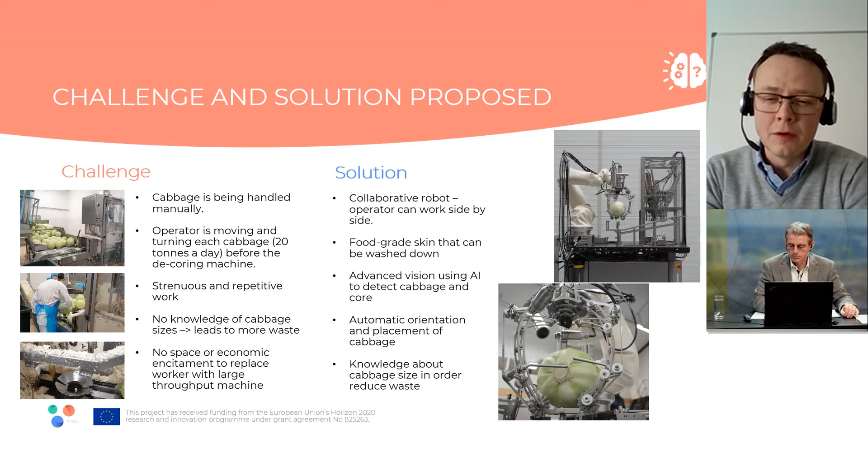One side note was that using the system, we were also able to estimate the size of the cabbage, meaning that we could optimize or minimize the waste that was produced.

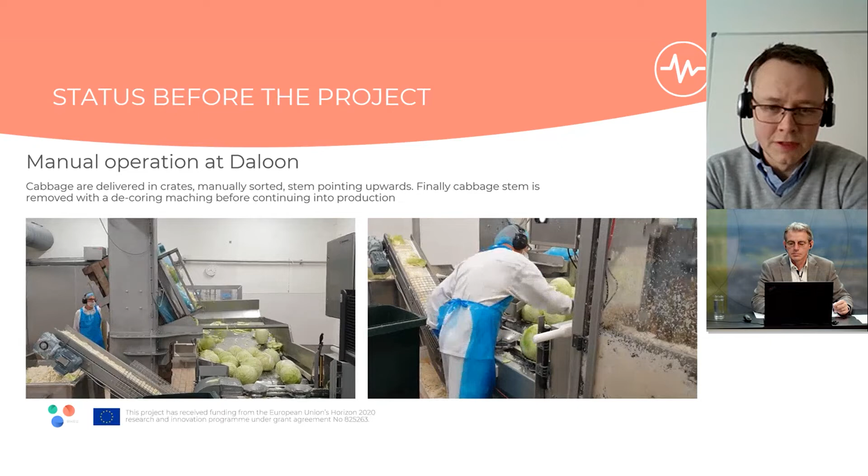So this is the way that it's done today. The manual worker is placing the cabbage in the machine, and he needs to reorient it every time.

This is just a video showing some of the other machinery that they also have, and at some point here you will also see what is happening with the robotic solution that was worked on. Here it's measuring the cabbage size, and this is the decoring machine that goes in and removes the stalk.

This is then the gripper that was developed in this project. It is able to reorient the cabbage, and then a vision system, as you will see shortly, will find the root.

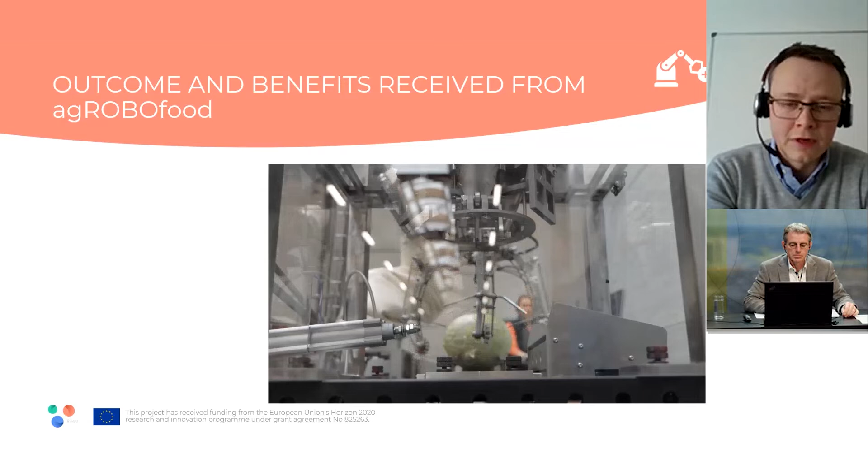You can see here that it's rotating it to search for the root, and when it sees it, it figures out how to align it. You will see in a short time it will also show how the AI is working.

Here you can see how the stem is located, and then it's estimating how the cabbage should move in order to get it aligned. Now with the new decoring machine, it was able to only remove the part of the stalk that was needed to be removed.

So to sum up on this, Daloon, which was a company producing these spring rolls, gained a lot of insight into how collaborative solutions could be implemented. Of course this means that collaborative robots are especially good for situations where you have space requirements or don't have much space in your factory.

Then, of course, there was the problem of food grade robotics that was solved with this sleeve that could be put on a robot, meaning it could be used for food processing. We used this AI vision component that was able to detect the root, and then use that information to orient the cabbage to be placed in the decoring machine.

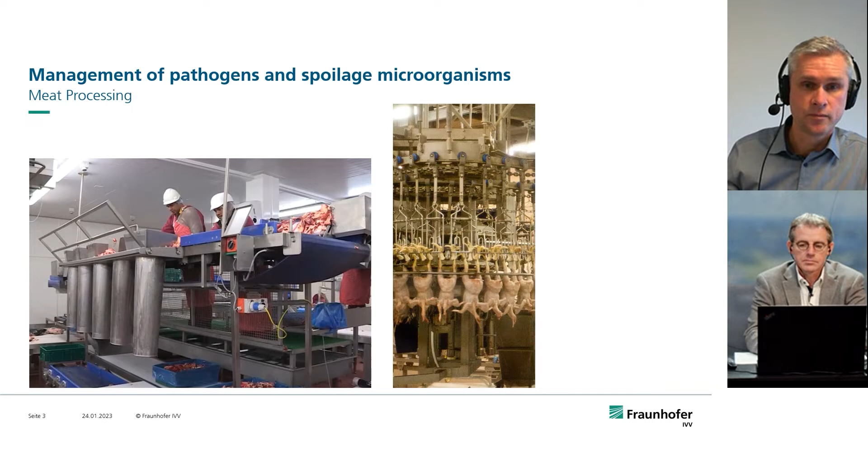The main challenge is usually in food processing, the managing of pathogens and spoilage microorganisms, to assure that microbial growth is mitigated. This is a huge challenge for almost all areas in the food industry, not only, as you see here on this slide, in meat processing, with relatively favorable conditions for microbial growth, but also in the production of dry products.

Measures must be taken to avoid microbial contamination as best as possible. This is a nice publication from 2013 with a good discussion and root cause analysis on how low water activity foods, or dry foods, are under constant pressure by foodborne pathogens.

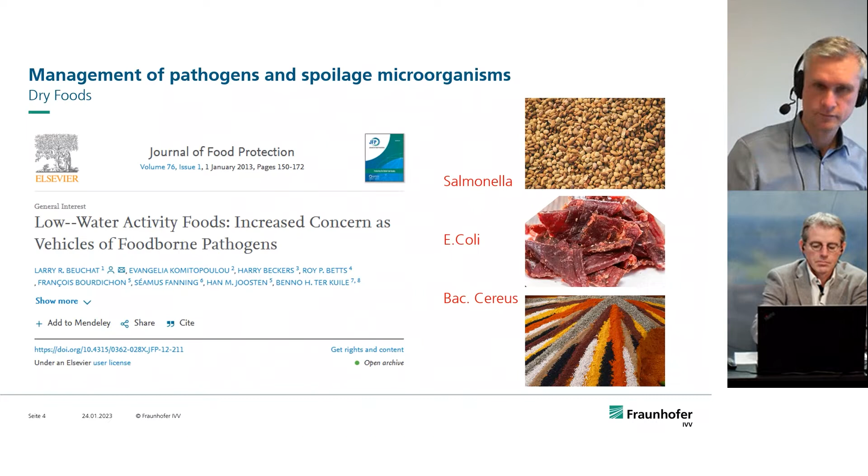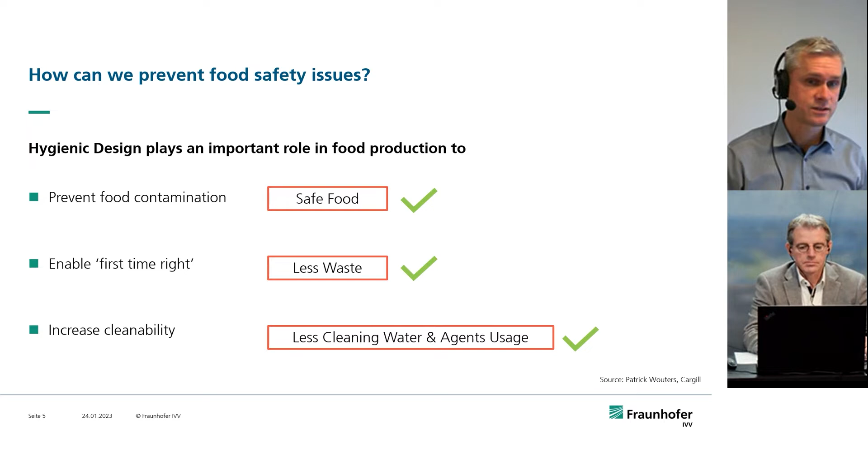If you want to prevent food safety issues, you have to deal with hygienic design, since hygienic design plays an important role in food production to prevent food contamination, but also to enable first time right, so produce less waste, and to increase cleanability.

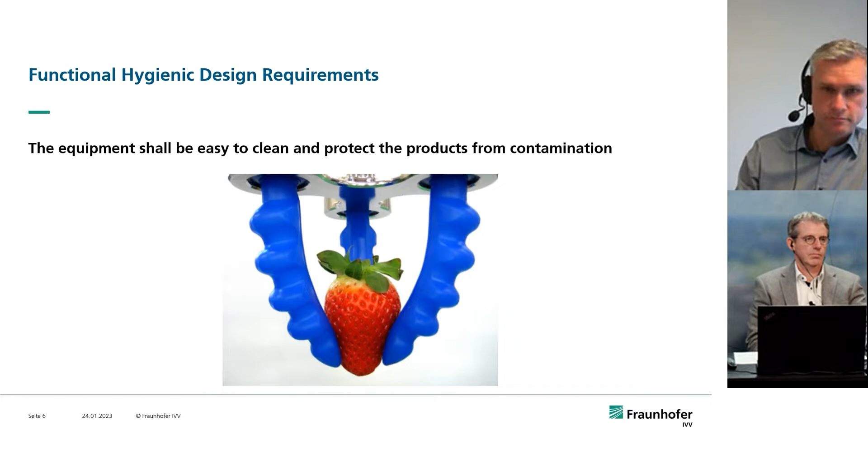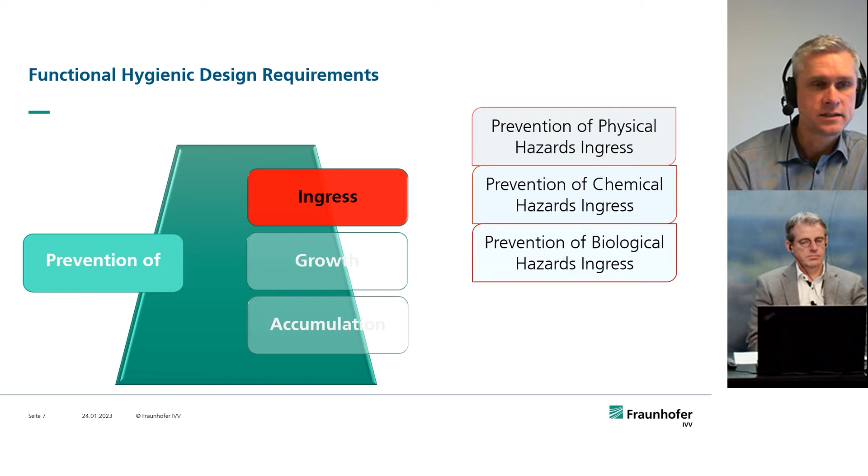There are 4 functional requirements on hygienic food processing equipment and food factories. The first requirement is that food processing equipment shall be easy to clean and shall protect the products from contamination. The second requirement is that hygienic equipment should be designed to prevent the ingress of physical, chemical, and biological hazards.

This can become very important during production where remaining microorganisms may grow very rapidly, and due to this, more frequent cleaning becomes necessary, just as is the case in meat processing.

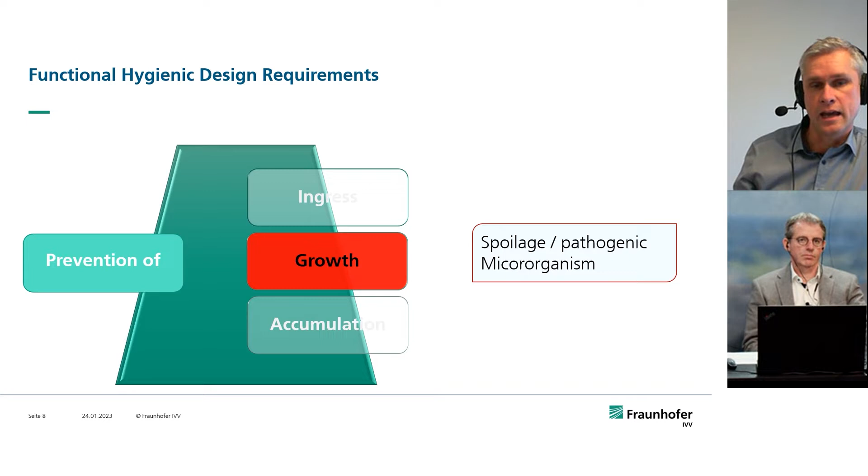Hygienic equipment should also be designed to eliminate any areas where product, dirt, dust, or condensate can accumulate or build up, as this can promote microbial growth.

Therefore, horizontal surfaces, hollow spaces, holes, and crevices should be avoided. Again, this can become very important during production, where product may accumulate very rapidly, and again more frequent cleaning becomes necessary due to this.

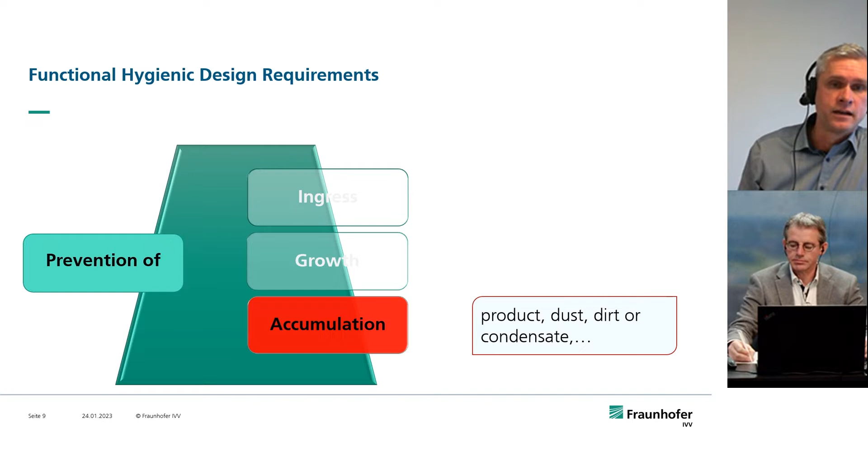These functional hygienic design requirements can be easily met by applying hygienic design principles, and this is not rocket science. As you see here on this slide, there are only a few general requirements or principles to be applied.

On one hand, hygienic equipment should be accessible for cleaning and inspection. It should be self-drainable and, of course, made of proper materials of construction, usually not aluminium, since there's an issue with cleaning aluminium.

Furthermore, it should have cleanable surfaces, and if necessary, a segregation into zones with different hygiene requirements should be considered. For the rest of the presentation, let's talk a little bit more in detail about the issue of crevices.

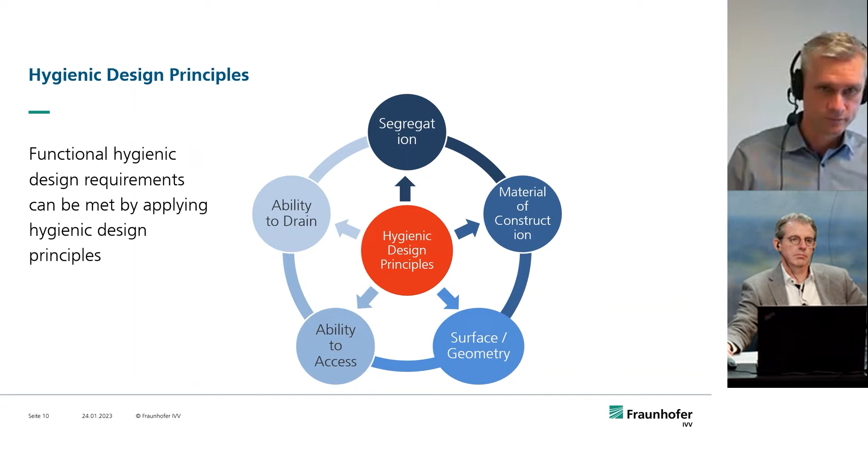Crevices in food contact areas are one of the main reasons for food contamination, especially direct metal-to-metal joints, which should not be used as they create crevices. Within the crevices, soil liquids may accumulate, microorganisms can grow, and of course, if you bring together two different metals, they can corrode.

If metal-to-metal joints can't be avoided, then please use elastomer gaskets to separate both surfaces, and then they are sealed and usually easy to clean.

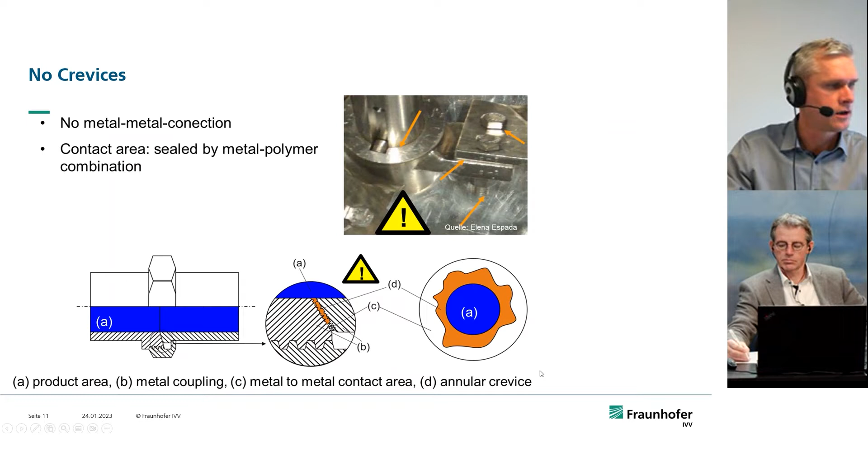What you see here in the picture is an example. This is an agitator shaft with many metal-to-metal crevices. You see here screw heads, you see here the shaft, and then the agitator. You have here the crevice, this annular crevice. For microorganisms, this is like a 10-lane motorway, quite a lot of space to be filled up with microorganisms.

Screw heads are another example of critical surfaces. Please eliminate exposed screw heads in your design, as they are not easy to clean.

I want to illustrate this in the video, which compares the cleanability of a standard open thread machine leveling foot, on the left hand, and a hygienic design leveling foot on this side. This part and this part are exposed to the environment, while this part above the screw and above this elastomer sealing is covered by the machine. So what is of interest for cleanability and hygienic design is this part and this part here, and of course the food itself.

What you see in the cleanability test is what I mentioned. We soiled both leveling feet with a fluorescent test soil. Green is the test soil, and when it's removed, the picture becomes dark. You should clearly see the difference in cleanability. So let's start with the video.

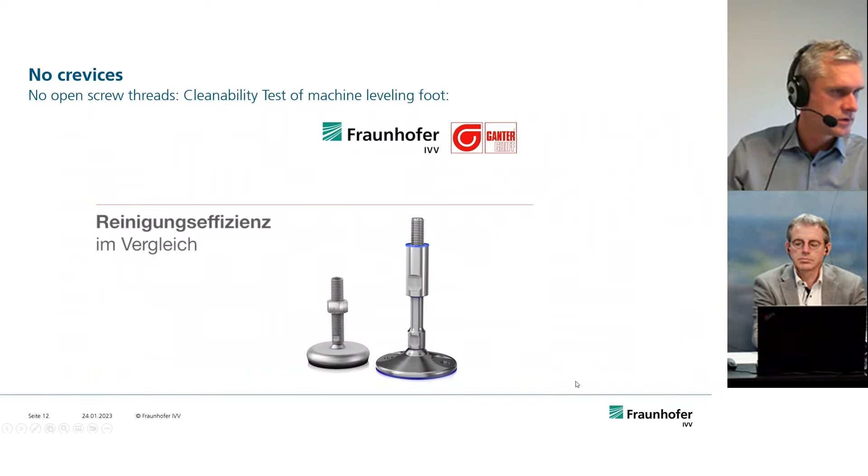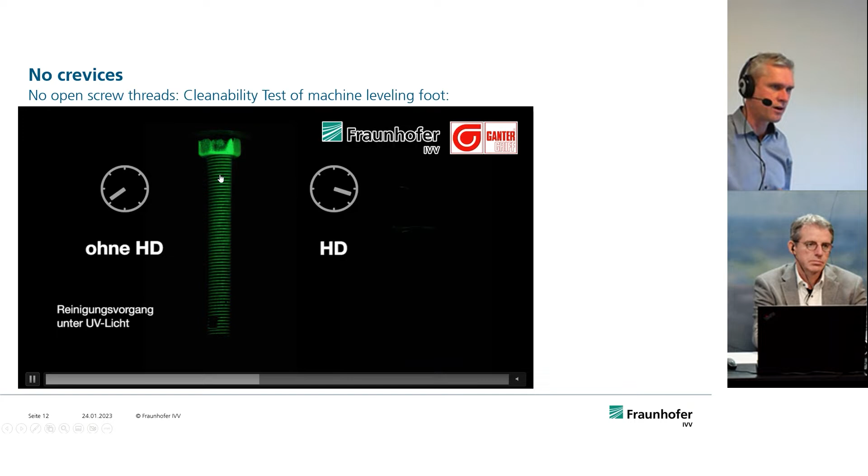This is without hygienic design, this is with hygienic design, and you see that screw threads are actually not easy to clean. We've cleaned here with spray cleaning and foam cleaning, which is a normal cleaning procedure in food processing.

Here you see a comparison in cleaning time, which of course is one issue. With the hygienic design, you are faster. But the major issue with the non-hygienic design is that it's not cleanable at all. You always have residual soil on the surface, and this is very nice for microorganisms. They can grow very easily and spoil the rest of your factory.

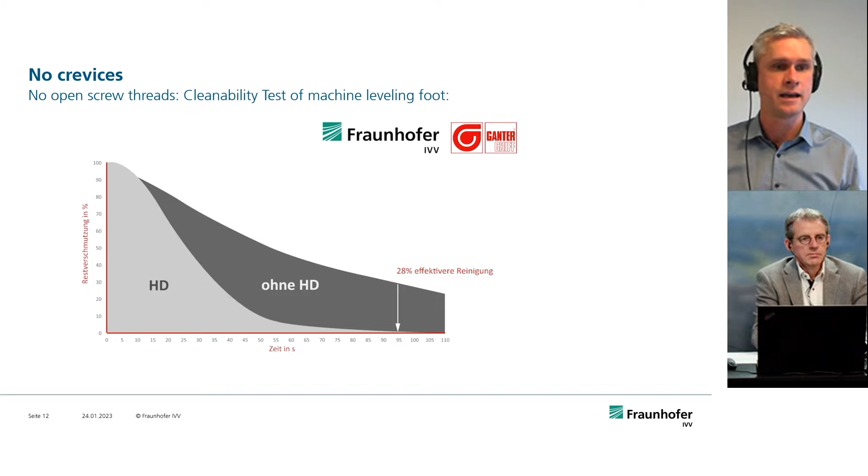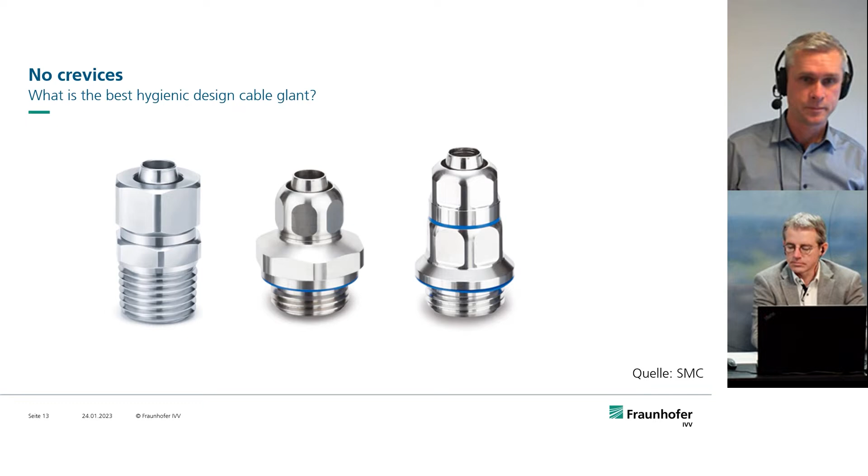From my point of view, a critical area in the design of robots is the design of the joints, which also must meet the functional hygienic design requirements. The use of O-rings to seal the joint is not a solution, as you see here, they form crevices.

If you use the standard design, this is actually a hygienic design O-ring format, but you have here these crevices, and this is not easy to clean. You have these crevices here.

Here you see the result of a cleaning test that we did with this design solution. What is white here is the residual soiling in the crevices after a spray cleaning test.

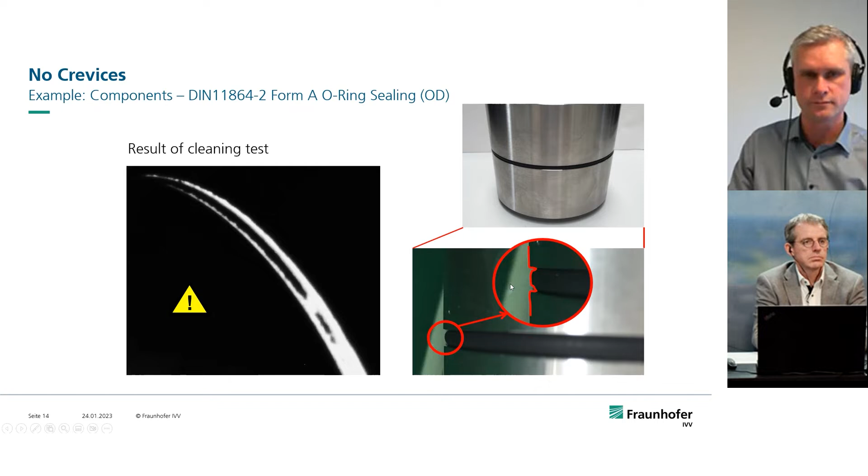So maybe all the discussion on hygienic design in robotics comes down to the question of whether the application of robots in hygienic food processing areas is possible only with protective covers. From my point of view, I would say with a good hygienic design, it's of course possible to use robots in direct food contact without a protective cover.

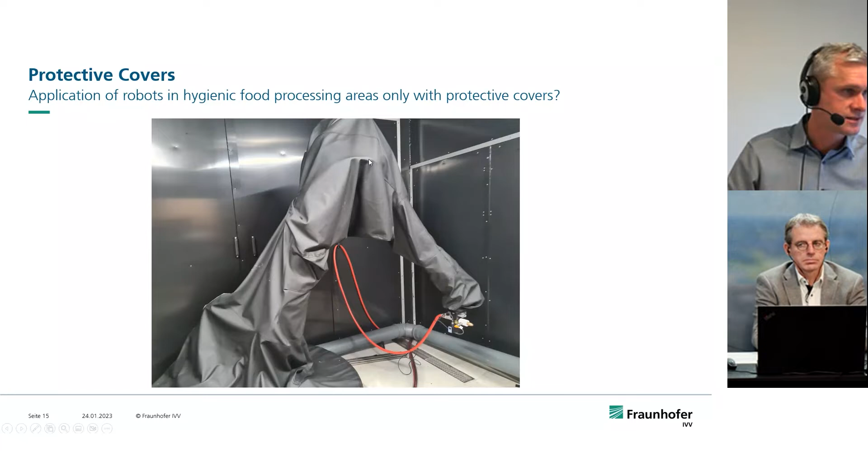But if the robot is not food grade or in hygienic design, you have to use these protective covers. But you know there are other issues with this.

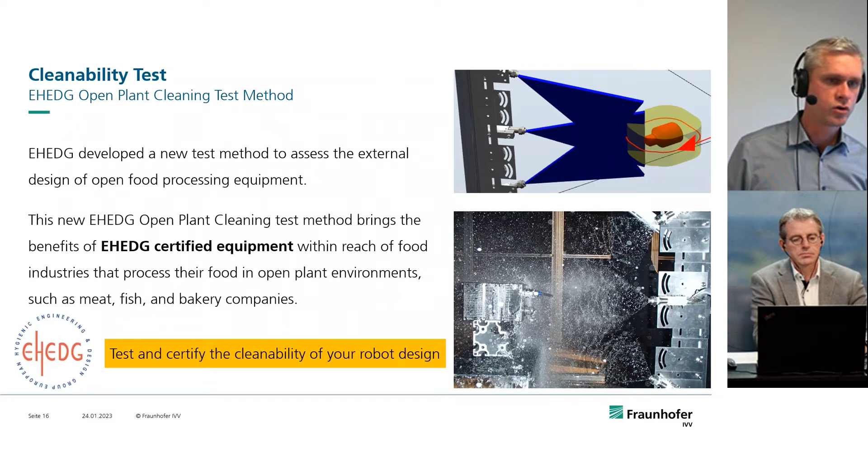So as a short summary, hygienic design and engineering of equipment assures that food is safe and suitable for human consumption. Functional hygienic design requirements can be met by applying hygienic design principles. This is not rocket science at all. Hygienic design can be assessed by cleanability tests. And last but not least, hygienic design certification is available and recognized by the food industry.

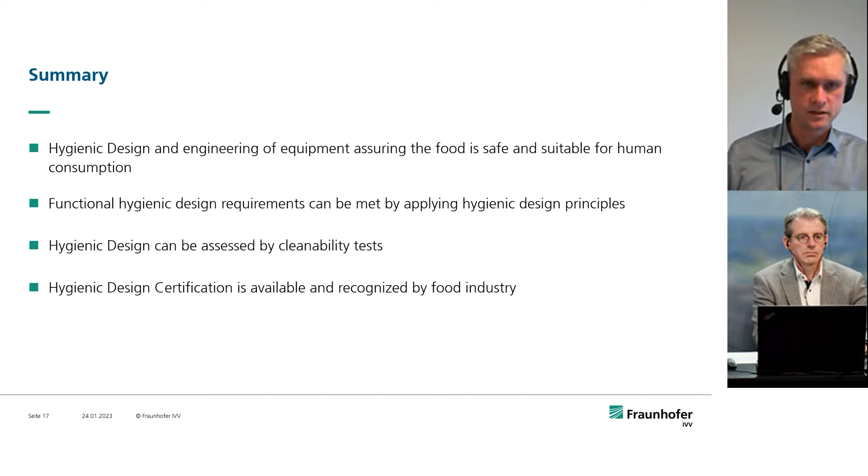So I did a project together with Mark, and I value that very much, that project, and we learned a lot from it. I try to apply all the knowledge also in our projects today, and we are even taking part in our hygienic design network in the Netherlands. So we are moving into that direction. But we are also in contact with many startups and research groups who all want to handle food, and of course we value that very much. But can you explain, because they are all new in the field, what should they do? What's the first step if they are going to handle food? What are the roads to go? Who should they contact, so to say?

Yeah, of course, as I said, it's not rocket science. The first step could be to go to the EHEDG webpage, ehedg.org. There are guidelines available. Document number 8 is free for download. There you can find the main principles. They talk about materials of construction, the roughness of product contact surfaces, crevices, with a little bit more explanation than what I've shown here in the presentation. All the information you can find there. So this is probably the best starting point.

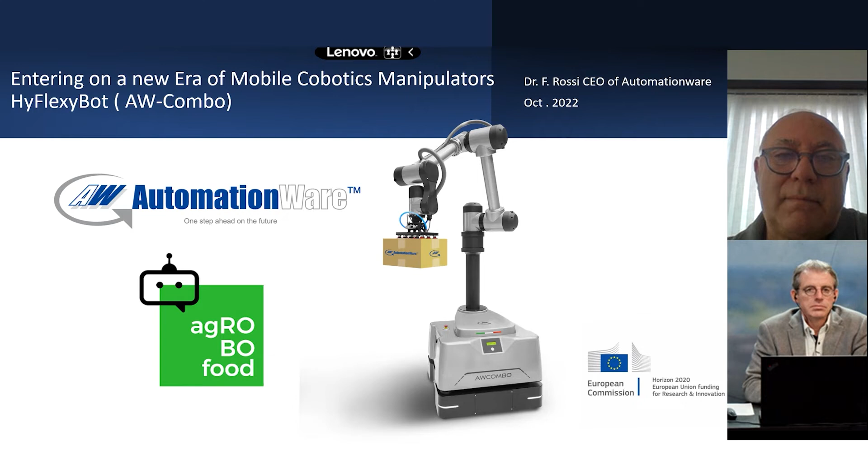So the company, thanks to this project, has been acquired a few months ago by a large industrial group that is going to bring our technology to a very large customer. This is giving you a clear understanding that this is a very successful project. It has an impact on food application, especially on the end of the line and logistics, but also in other segments. You can recognize some of the brands that are asking us to use this kind of technology for logistics and end of the line production.

Few words on the company. We are based in the northeast of Italy, close to Venice. We are ISO 9001, and we are also certified EcoVadis. This is a main requirement to apply that kind of technology to the large accounts that we are targeting. Very strong collaboration with key research centers, Fraunhofer Italy, for example, that have been part of this project. They really helped us a lot to create the software platform and the conceptual AI technologies for this project.

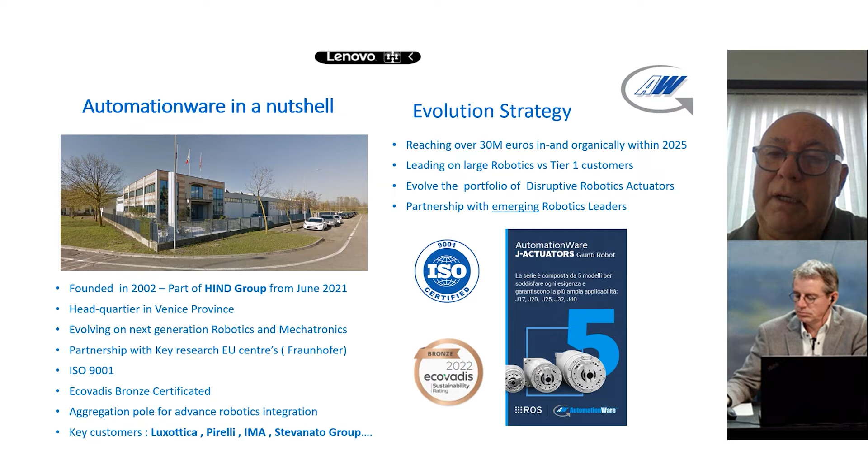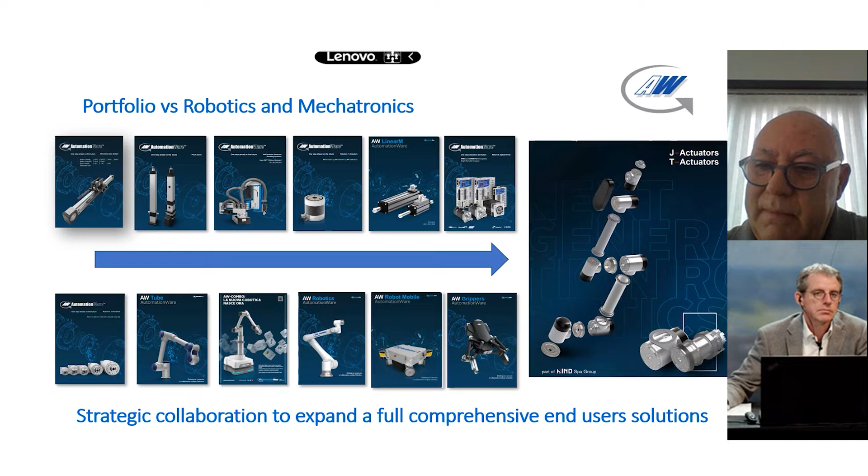This is what it is. It is basically, as I mentioned before, a robot that can really move around with very incredible precision, even in limited space areas where you need to do small movements to make sure that you can really pick and palletize end of the line food production, for example. Then we can select different kinds of grippers, so you can have different arm configurations. There is a 3D camera embedded for the navigation system and the picking, but also a good level of safety to be compliant with the regulations that require this kind of robot to move without risk to humans in the environment.

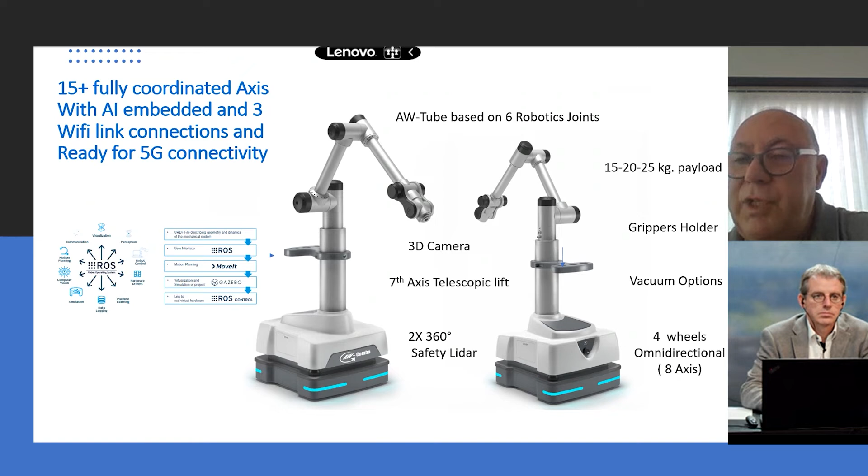So we are in the process of doing the certification of all of this. The joints are already certified by TÜV, and even the arm. We are now in the process of certifying the full system.

There is a great fit in the agro-food industry. The pharma industry is also looking at this kind of system because we can offer agility, and also we can avoid contamination on critical production systems. I'll mention specific applications in a second.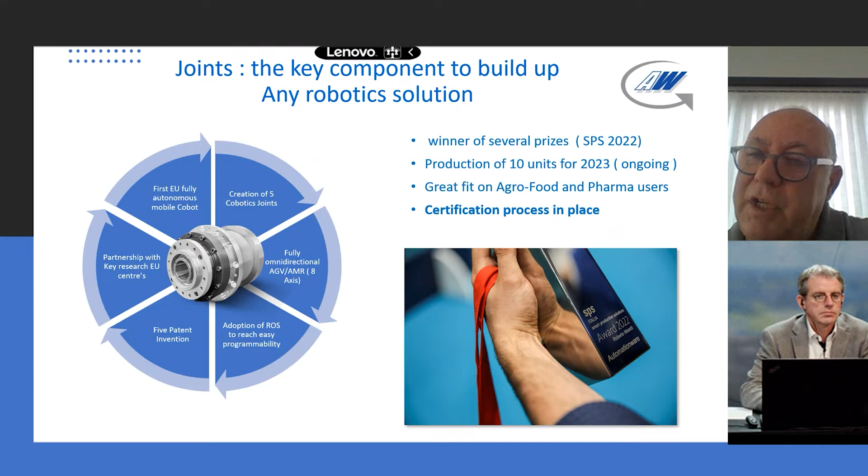Here on the left side you can see a small video showing the joints completely disassembled, and then the composition on the right side, where we basically compose any kind of arm required for the application. It can be a small arm or a large arm. One important thing, one of the limitations of cobots, is that the payload can go up to 25 kilograms.

That's very important when you have to palletize, for example, or do picking of very heavy stuff. So once again, the approach was to use a robot that can be suitable not just for traditional robotic applications, but also as a modular system that can be applied in the agro-food industry, even for external activities like picking fruits or similar tasks.

Again, there's flexibility to have joints that can be completely purchased naked, and we already have some packaging food customers looking at this kind of joint to produce their own arms, to be embedded in a hygienic way on their machines.

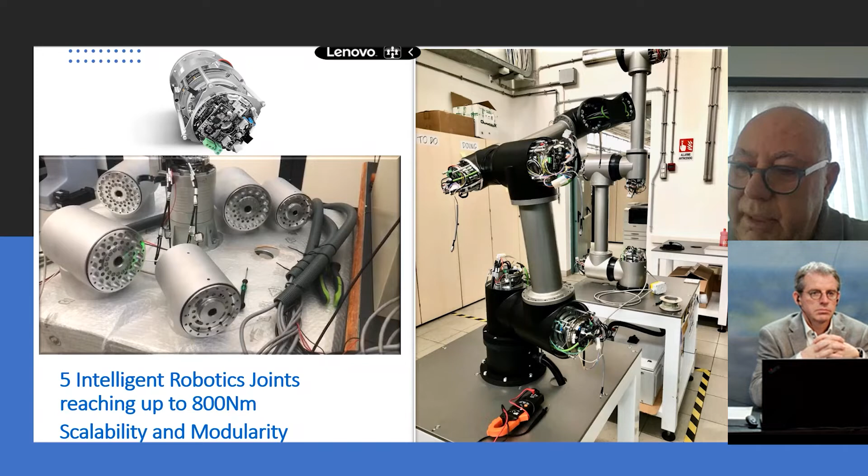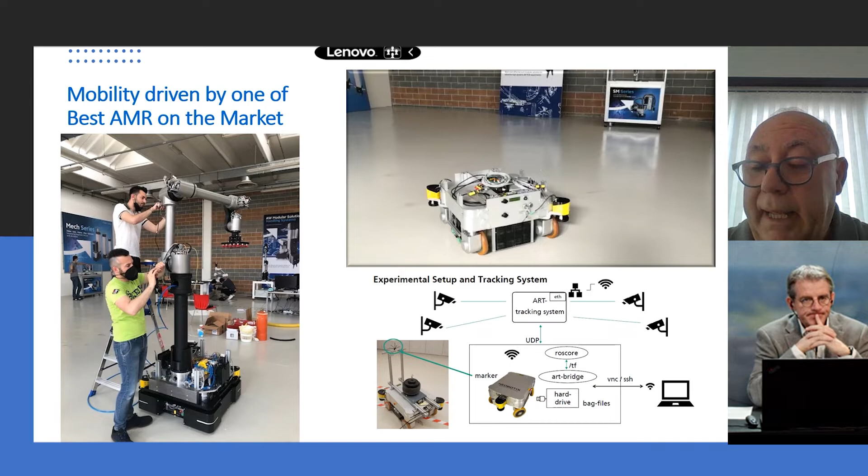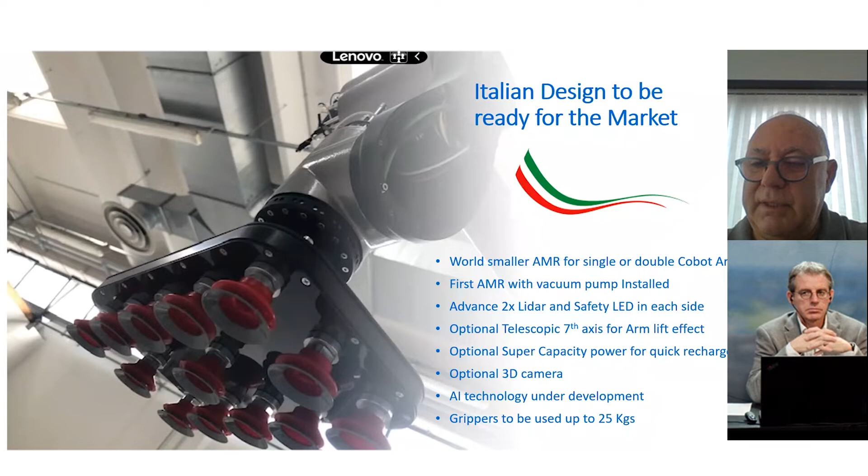Even in cases where the carton is not completely flat, we can partialize the vacuum activities or boost with an additional pump embedded on the AMR, adding pressure or additional vacuum to make sure we can lift any kind of carton available. The maximum payload can be 25 kilograms.

A few pictures of our daily life during the development of the project. You can see a lot of young people. ROS was the base of all this development, and we are now migrating to ROS 2, which is the next future platform. One important topic I have to mention here to the audience is this.

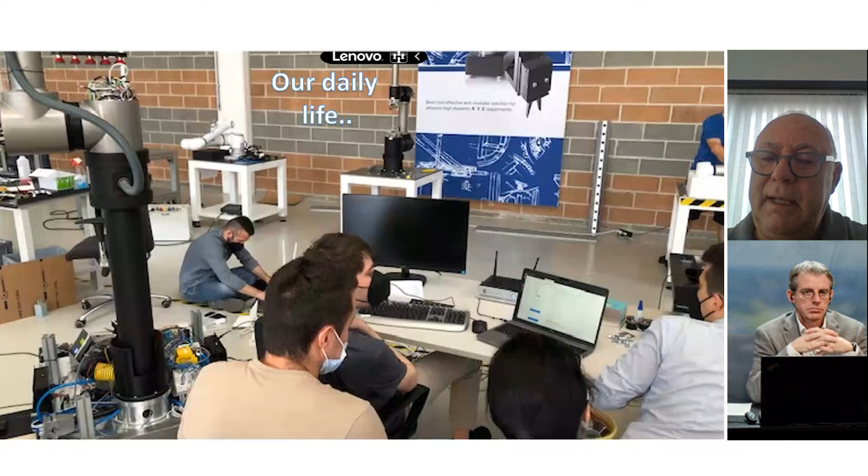This is a kind of robot that can really act in real time. That's a fundamental thing to make sure we can perform actions with minimum latency and limited delays in the activities.

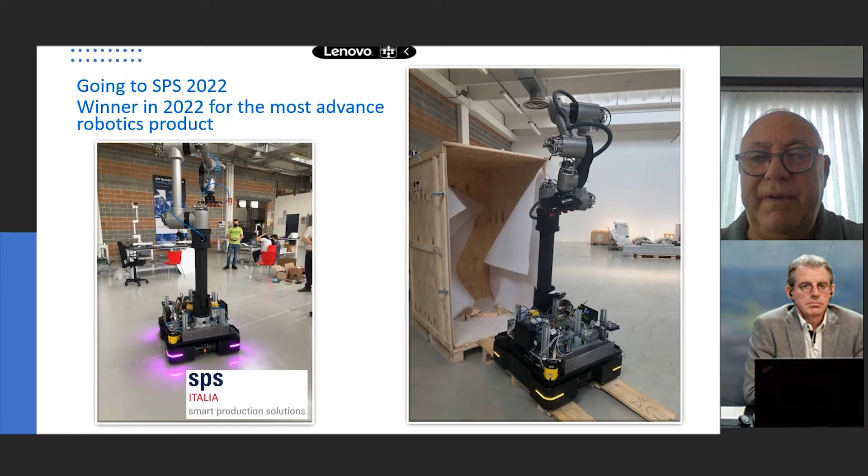Here is the departure for the exhibition several months ago, I think it was 7-8 months ago in 2022. But basically, we won that fair show event. And this is our booth during the show.

There you can see the robot in its first movement, during the first presentation to the press in May 2022. The software was extremely basic at that time, and today the situation is very different. We are still developing advanced algorithms for its navigation and picking activities.

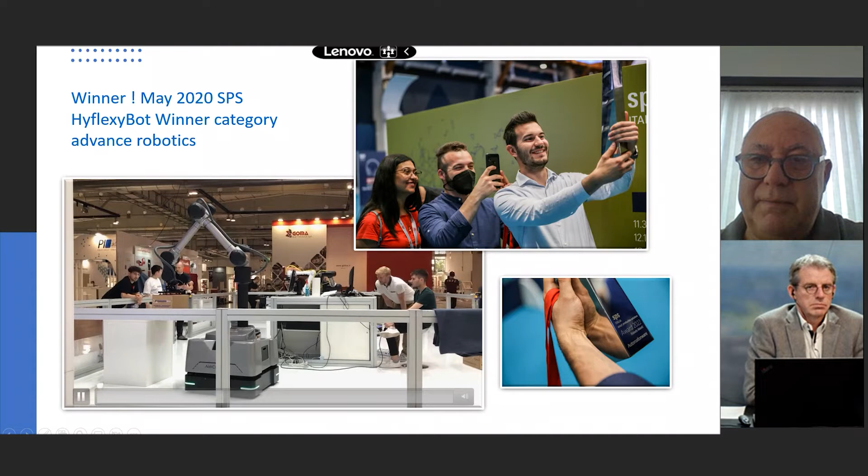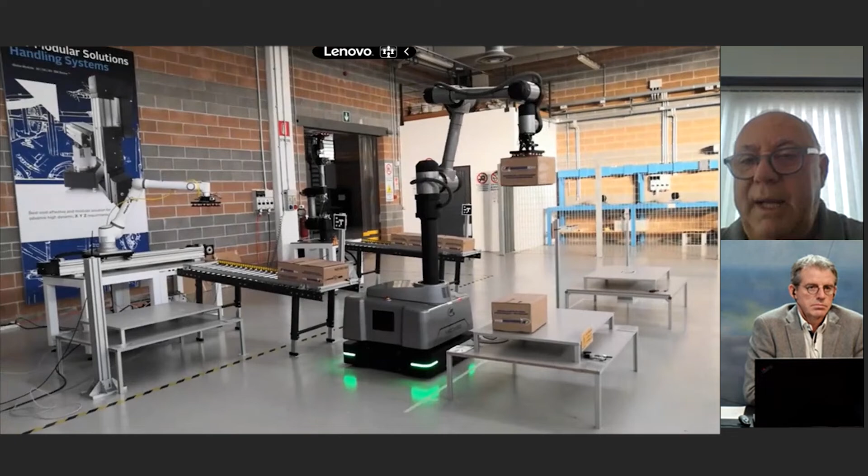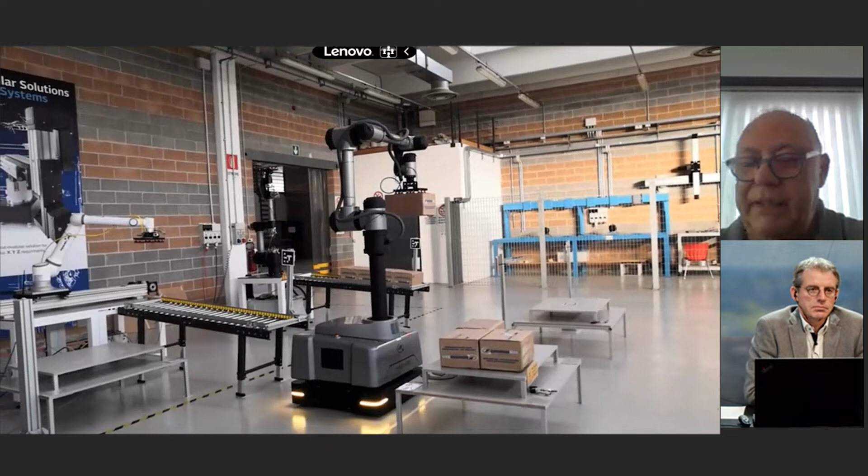Here is an example of what this kind of robot can really do versus end-of-the-line application. In this case, it's palletizing one end of the line, and then when it has done its job, it can move to another location and palletize again. Of course, this is the major feature of this kind of robotics.

So it can be applied in different kinds of situations, different kinds of markets. Food production is one of the target markets because there is incredibly heavy and repetitive activity done by operators in picking and palletizing cartons for the end of the line food production. This is the kind of job that doesn't offer any quality to the human person. So doing this kind of process with this kind of robot is probably the best way of acting on that.

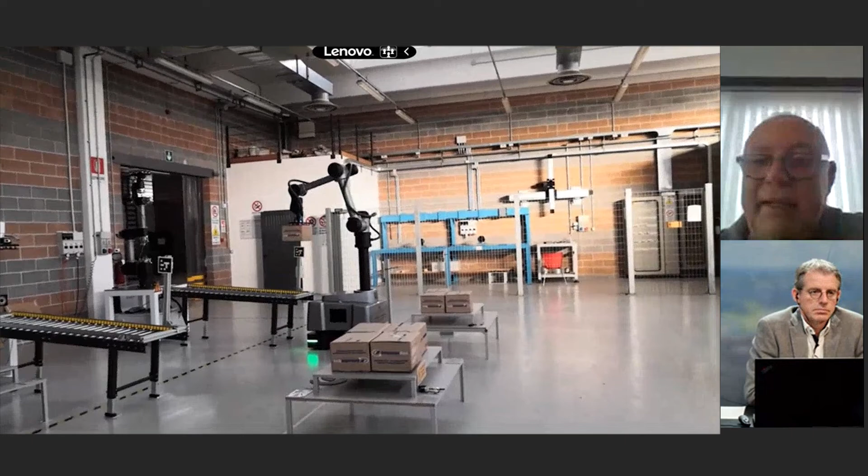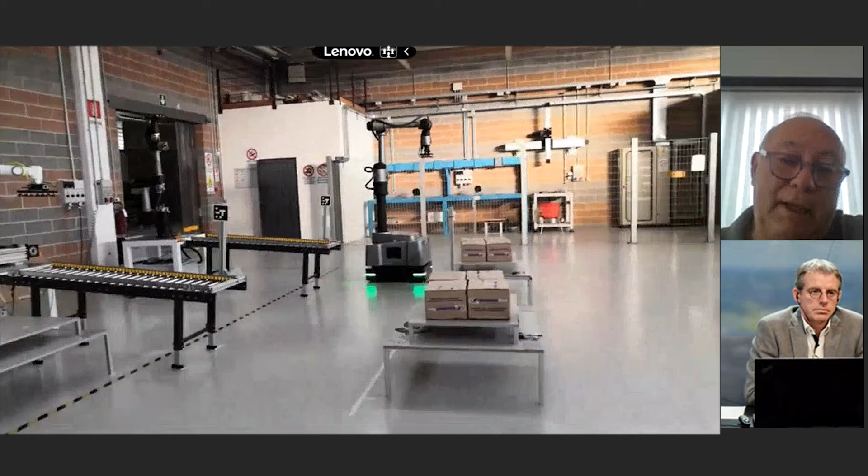And the other thing is, this is limited in this case - you can see only 2 different lines - but it can navigate inside the factory and really position itself in front of any kind of line that may require that kind of picking and palletizing process. The pallets can also be picked up by traditional AGVs, so they can do the rest of the activity to transport the pallet to the logistics operations.

Business-wise, we have basically sold 10 of these units. The customers are well-identified customers - you may recognize their names. Zero Farm is one of our vertical farms in Italy. The purpose of this project is really to have matrix trays carried on a specific rack for AGV transportation. So the activity of handling is completely done by our robot, so that they can move from one location to the next one.

Bonduelle is another customer. They want to try end-of-the-line salad production to make sure they can do more or less the same job. So they want to have a robot in front of the end of the line to put the cartons on a pallet, and then an AGV handles the transportation. But the robot itself can move from one line to the next without any problem. So it really gives flexibility and removes the need for operators that may be required for more intelligent tasks in different areas.

So this is another important project that is really giving us an incredible opportunity in the food sector. Of course, other local Italian companies are looking for this technology - again, end-of-the-line production of gluten-free products, where there is also a discussion about contamination, but also end-of-the-line production for olives, where again you may have boxes with cartons, and again you want to move the robot from one location to another.

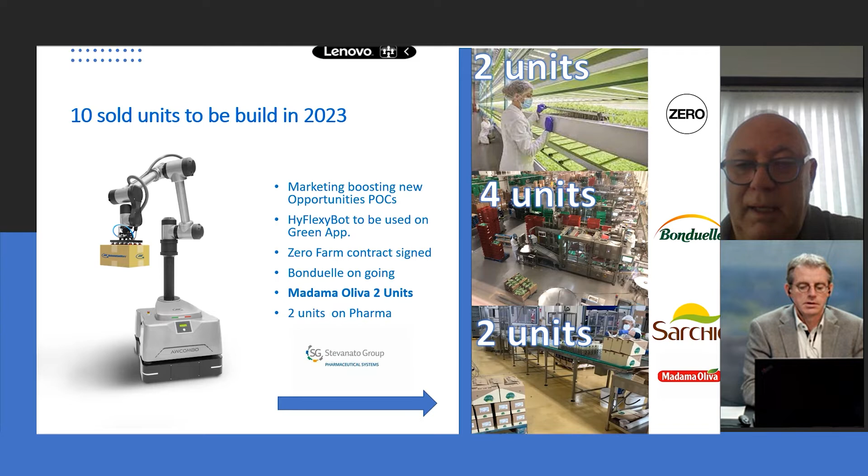This is an example of COVID vaccine production, where we are going to use this kind of robot to really avoid any contamination from an operator. This is one of the largest producers of COVID vaccine. They are doing now the test for picking and palletizing.

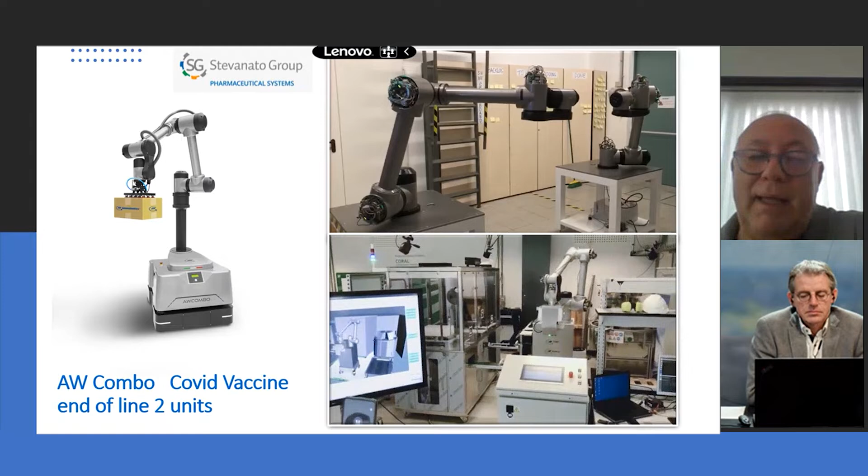And I'm basically done. So the product is now available for the market. We have already fulfilled the queue for 2023. We have competitors for this kind of product - Boston Dynamics, you may know them, and they have an equivalent product, something very similar to us.

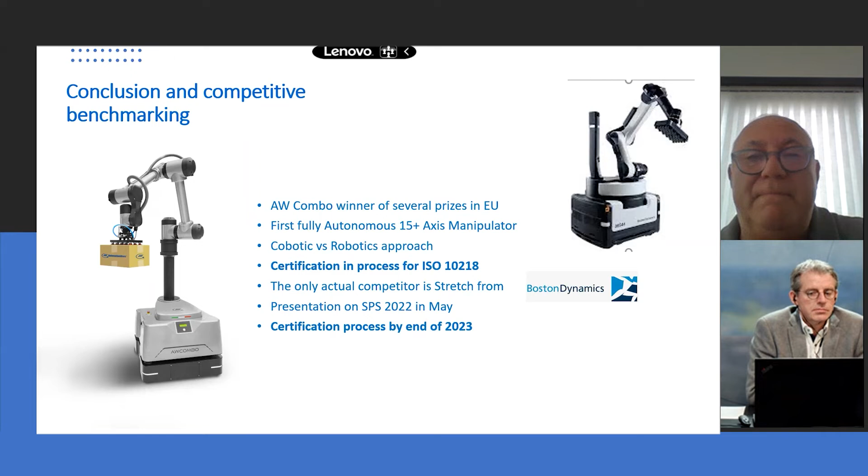Gonzalo is asking, how much weight can the robot carry with the arm extended? 25 kilograms is the maximum, and the arm itself can reach 1800 millimeters.

Okay, and we see that this robot is also used in some food companies like Bonduelle, but I know that it's probably more for packed products - or how hygienically designed did you make your robot? Was it an issue? Hygienic design may become a challenge in the future. End of the line is not a big issue, but for example, for the vertical farms, hygiene may become an issue, even if the cultivation may be cleaned or washed before the process.

However, once again, something I mentioned before - we are developing chassis as well. I was very pleased with the presentation from Fraunhofer earlier. We are looking at producing chassis for hygienic applications. Actually, we are working with an Italian company that wants to do this kind of thing - they want to use this kind of joint for hygienic applications.

Today I want to give you an idea of a task that we have been carrying out for the last couple of years on how we can use human information to build the robots of the future. The kind of work that we are looking at is handling of fresh products like oranges, as you see on the screen, but also cabbages, as you saw in the first keynote. So anywhere where there is a lot of repetitive tasks on our factory floors, where humans are still involved, how can we build and design robots that could carry out those tasks?

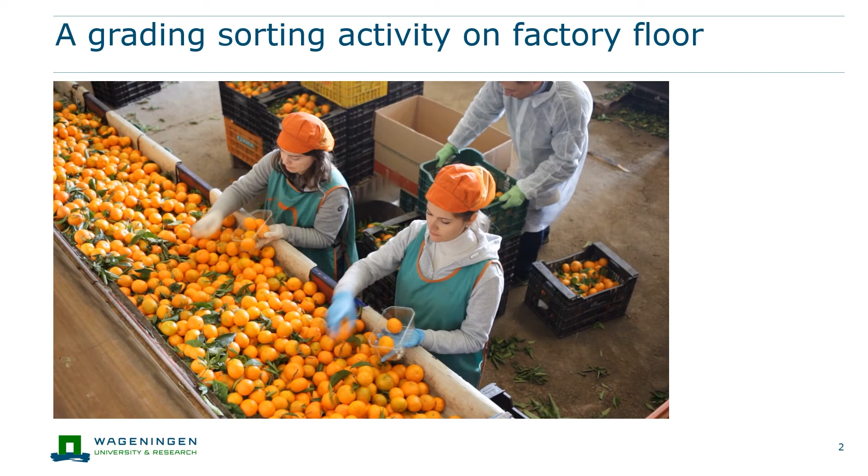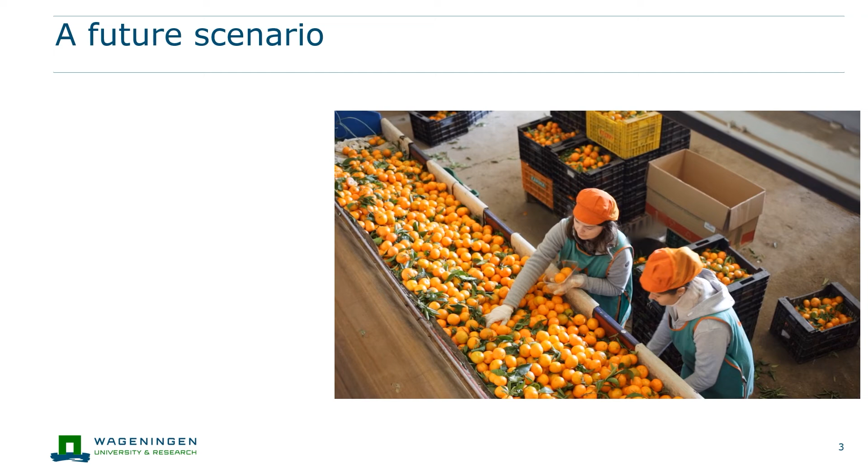But we look at it slightly differently. When you have a new worker that joins a factory and you want to teach them to carry out repetitive tasks, you usually demonstrate to them how the work can be carried out. And we take a very similar approach. We think of our robot as a student, or as an intern, as an apprentice who comes to the floor and can observe human actions and learn from those actions, and repeat the task that is being executed by the demonstrators.

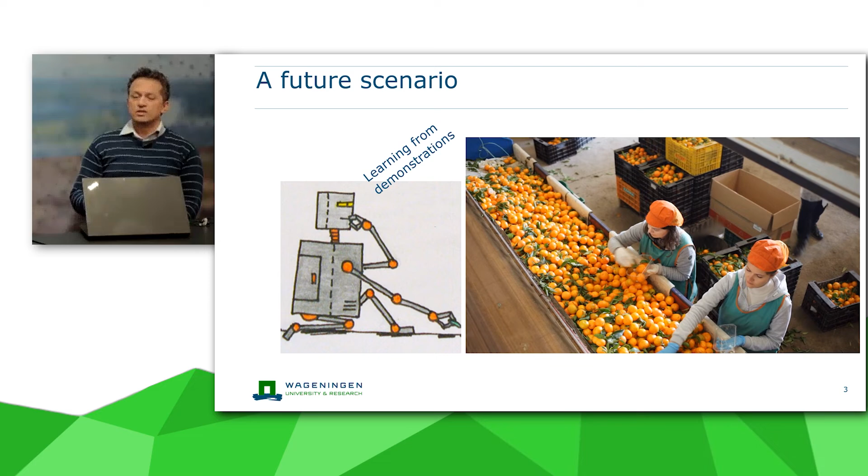So we set out with this goal, and what we want to do is learn grading and sorting activities of various kinds. And the approach, as I mentioned, was that of learning through demonstrations, or learning from demonstration. So learning from demonstration is actually very, very old as far as robotics goes. It's perhaps one of the earliest ideas why robots are needed. We're still very far from having such devices on a regular basis used in industry, but we think in repetitive tasks like grading and sorting, for multiple reasons which I will get into, a technology like this might be the future.

So what is the advantage if you have a robot that could learn from demonstrators? One of the biggest advantages is, right now when we design robots, we design them for a particular task. So if you have a robot for a cabbage factory, you'll design a robot that is specific, for example, to handling cabbages in a manner that is suitable to the industry you're working with. What if you wanted to use the same robot for handling oranges, as I showed in the first screen, or apples for that matter? So many times you see that there are commonalities in tasks, and if a robot could be taught to carry out more than one task, then suddenly the value of that unit is much greater than a single robot for a single task.

Another thing we're looking at, sort of a side effect, is when you have a small robot that could be placed in a factory at multiple different places. You do not need to modify the factory settings because the robot itself is small and can be placed at multiple places, primarily where currently humans are in the loop. One of the main reasons for approaching technologies like this is labor shortage.

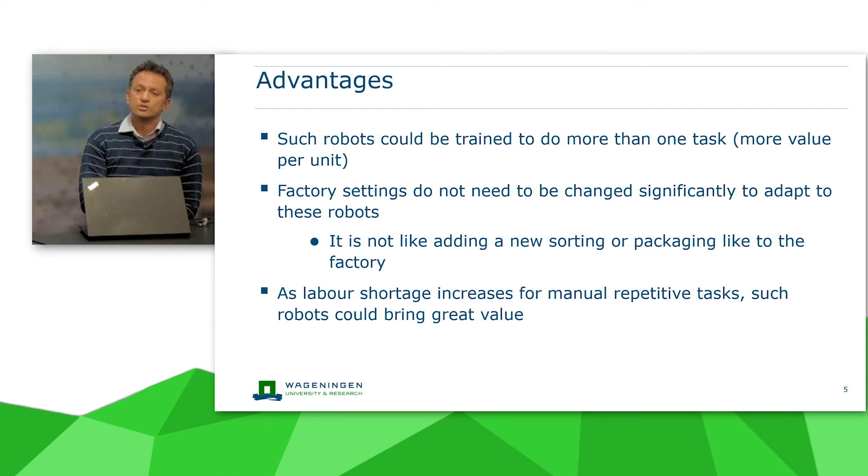So what we are looking at is learning from demonstration. To understand that, we need to understand what exactly is a demonstration, what exactly is an activity. We define an activity as something that a human demonstrator, a human teacher, is carrying out. And to understand that, you need to understand what exactly is happening with the body of a person.

Besides the body itself, an activity involves what is happening to the environment around it because of the action that a human is carrying out. That means you need to understand what is happening in a shared scene between a robot and a human. If you can combine all of that information together, you may have the sufficient minimal information needed to understand the activity that was carried out, and that is the first step to be able to replicate the activity as well.

One thing I should say beforehand is, as far as demonstrations go, one of the things that humans use is natural language, and that is not something we are looking at currently in our activities. We are primarily looking at visual demonstrations.

We approach understanding human activities in two different manners. On one hand, trying to extract the atomic features. Atomic features here is how our skeleton moves when performing a certain activity. There are two examples of me and a colleague of mine, Uldi, who are sorting the fruits in front of us into different categories.

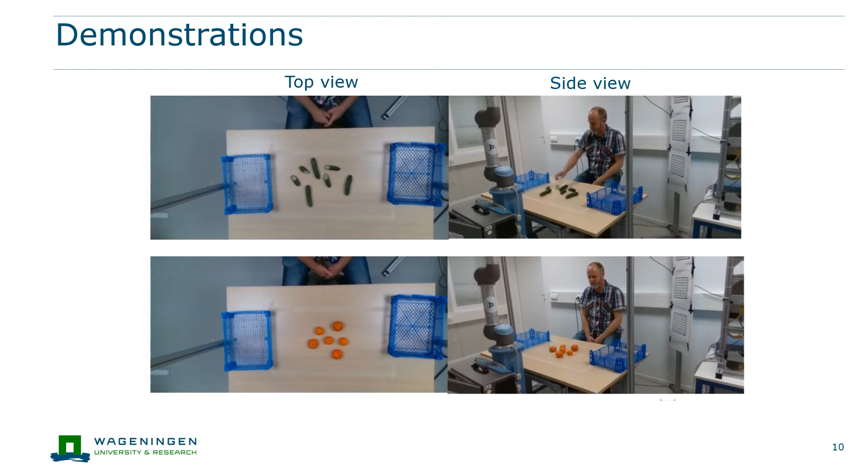The side view gives a very clear, or more or less clear, observation of the human itself. Why is it that we need these two views? The side view helps us greatly in understanding what is happening with the body of a person. That means we can use some off-the-shelf deep learning methods for pose estimation, so we can track the joint movements much more robustly.

While the top view is much better to understand what is happening with the objects in the scene. If you were only using the top view to understand what is happening with the human body, the current methods are still not robust enough for that.

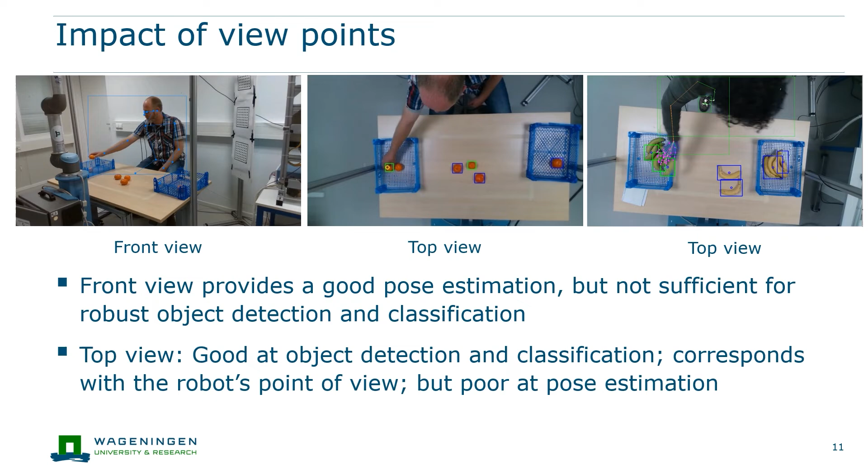On the extreme right you see the head of a person, and at the bottom you see a shoe. The shoe itself — and this is just an example to show you the robustness of a method — is actually detected as a face of a person, including lips and eyebrows. So the top view is pretty poor for understanding body movements. That's why we use the side view for the body, and the top view for what is happening with the objects in the scene.

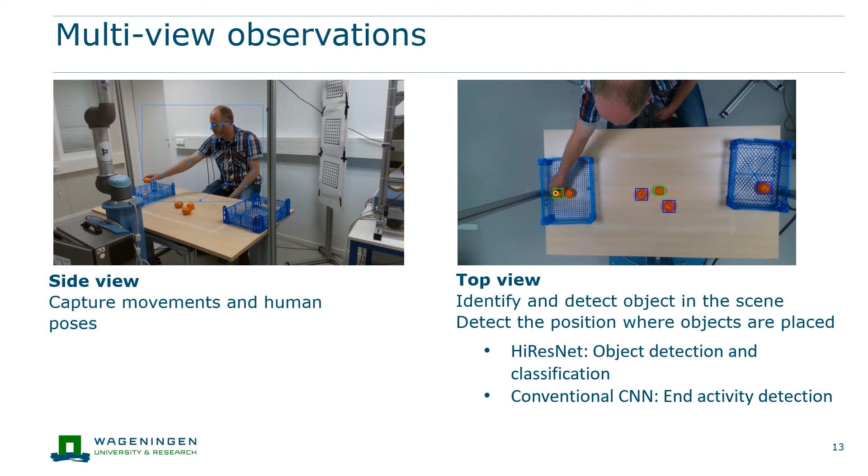So now you have these multi-view observations. On the top, we have the RGBD information. From the side, we only have the visual information.

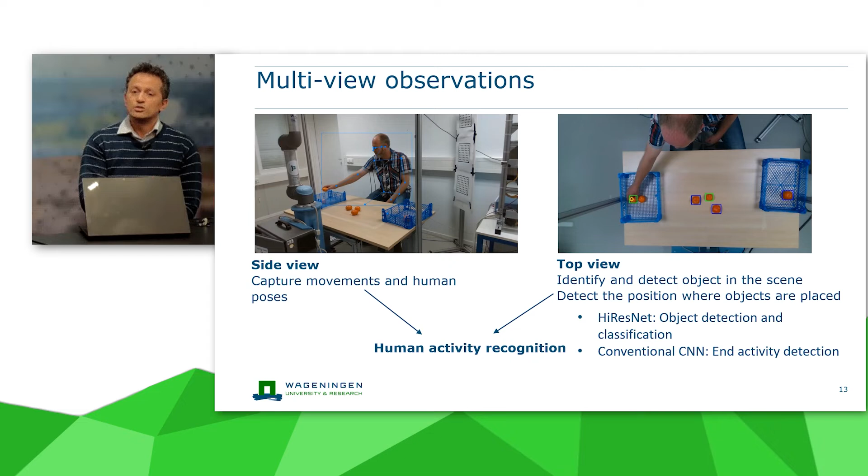And in parallel, we have the side view information, from which, when we combine both views, we get to understand what the human activity is.

In this particular case, we use temporal convolution networks to understand the activity itself.

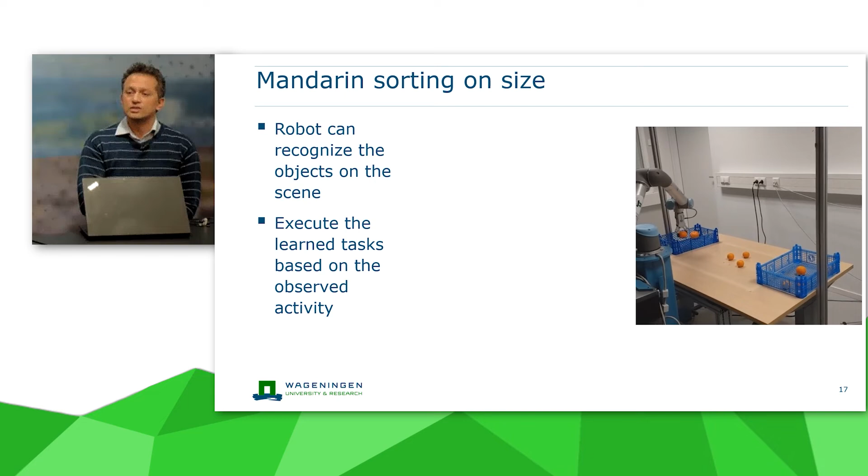This takes me to a couple of examples I want to show you. We do multiple demonstrations across a variety of grading and sorting scenarios. In this one, we have an instructor teaching how to grade and sort oranges, in just one video of one single demonstration. Based on that, this is a 4 times sped up video of a robot which has learned to grade and sort mandarins and oranges, basically on size information.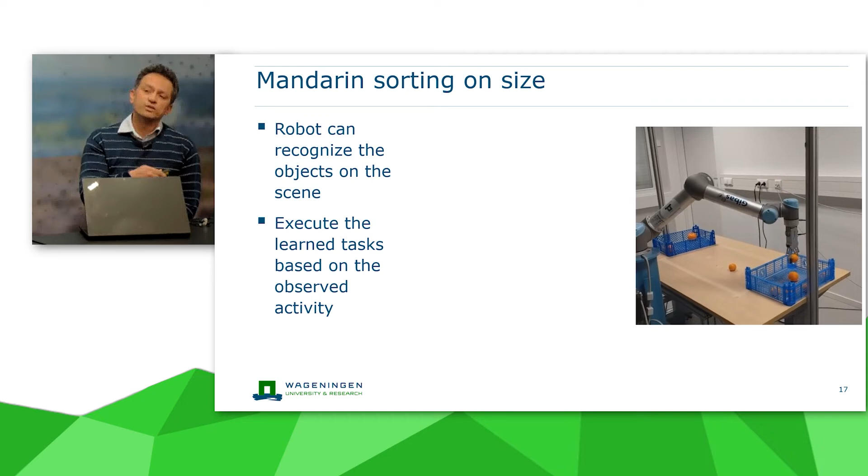One of the things I want to show you is that the same type of modules can be used to learn not just one task, but multiple tasks. The last example I'll show is sorting across multiple fruits. There are 3 different demonstrators who try to accomplish the task of sorting cucumbers and mandarins into different bins. Through multiple demonstrations, the robot is able to learn to repeat the task.

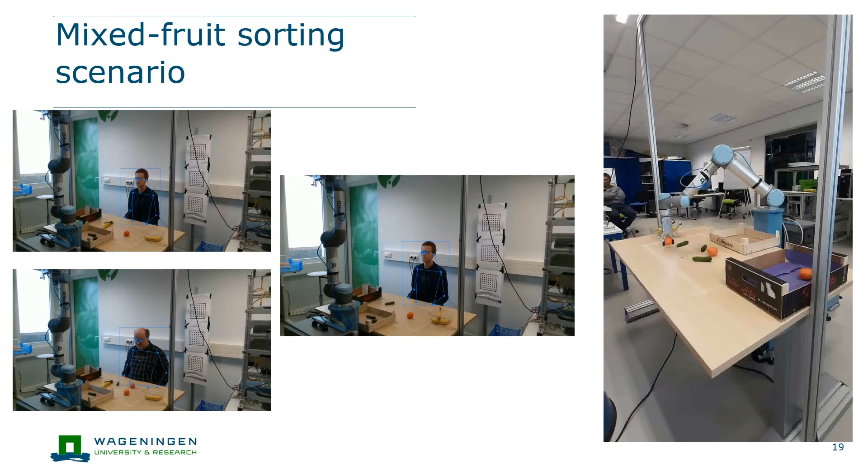An additional point here is that this robot is learning the demonstrations at a task level, meaning it is not repeating the joint movements of a human. Learning at the task level has many benefits, and one key benefit is you're not limited to the robot we are showing on screen. If a robot can carry, pick, and move objects in a given scenario, the task learning is independent of the physiology of the robot.

So, in summary, we are looking at one of the ways in which we can automate certain types of repetitive tasks in factories. Automation is already happening, and it is very clear to me, and I think to many of us in the audience, that this will continue to happen.

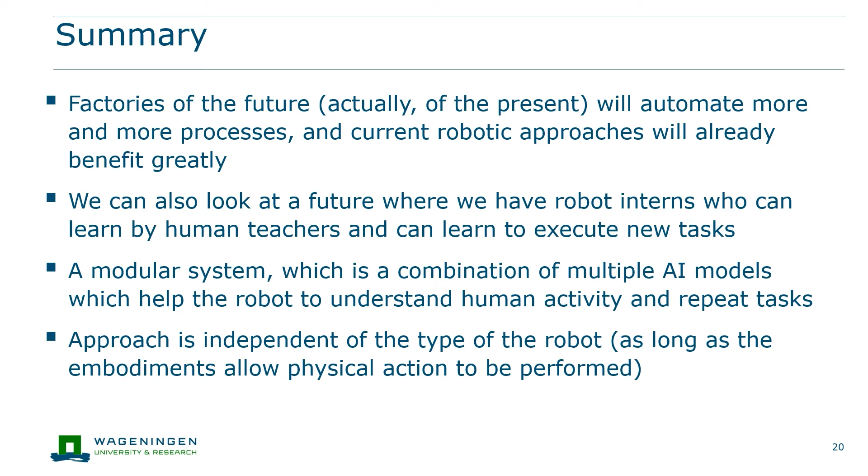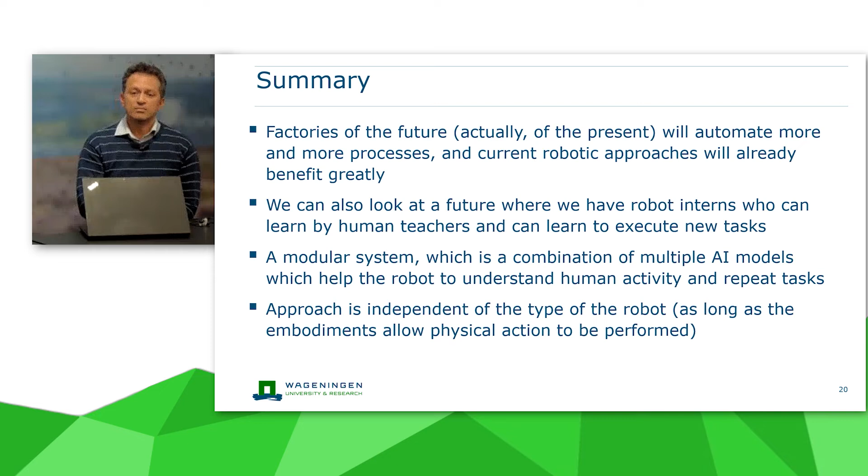What we are trying to see is how we can make the most value from a single robotic device which can carry out multiple different tasks. That means if today you are working on apples and the season finishes and oranges start, you can use the same robot and teach it to execute a task for the second type of produce. Finally, the approach itself does not rely on a type of physical robot, as long as it has the correct embodiments to carry out the action performed.

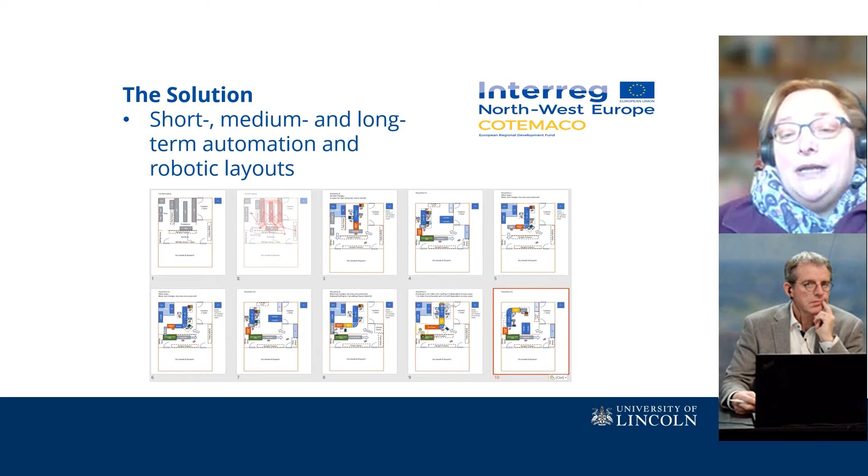You've got this inconsistent, soft, pliable, delicate nature of toppings. You have to be able to identify those topping components in the supply bins, determine which order you're going to pick them in. You've got the grasping issue, and then the accurate placement and release of toppings once they're grasped, and swapping between different pizza types and different recipes.

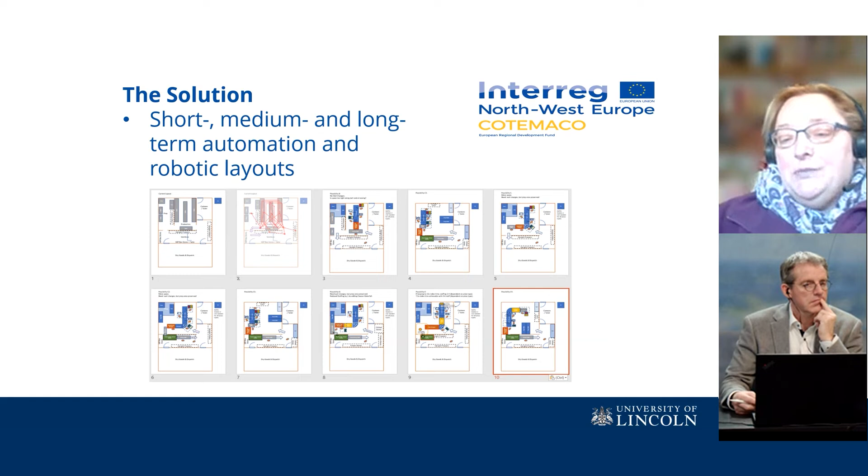So what we did was put in business improvement plans that were a collaboration between the management team and the workers at One Planet Pizza to make that happen. That roadmap was split into short, medium and long-term actions. The first stage of automation, about the installation of a process conveyor and an auto sauce depositor, delivered a 30% uplift in productivity. So straight away we achieved buy-in.

What they've now got and where they're heading is a fully robotic solution that's repeatable anywhere in the world. If you want to check out what's happening with One Planet Pizza now, they're in the process of raising capital to deliver that vision, with partnerships pending for that robotic, automated pizza line that will be delivered to 9 countries across the globe. So for them, it's been a real success.

But how do we get there? What do we do and what's our part in this? I'm based at the National Centre for Food Manufacturing, which is right in the heart of the UK's emerging food valley area. The team here are industry experts with specialist knowledge of the food and drink industry. We're made up of ex-industry professionals who've worked at some of the UK's largest food producers across R&D, supply chain, operational roles and academics.

Researchers and other partners are part of that ecosystem. We're covering other academic institutions, policymakers, manufacturers, technology providers, and we don't have any favourites in that allegiance. It's whatever works best for businesses. What we're doing is providing a storefront and a contact to that expert advice around emerging technology and digitalisation, because very often people don't know where to go or don't know what questions to ask.